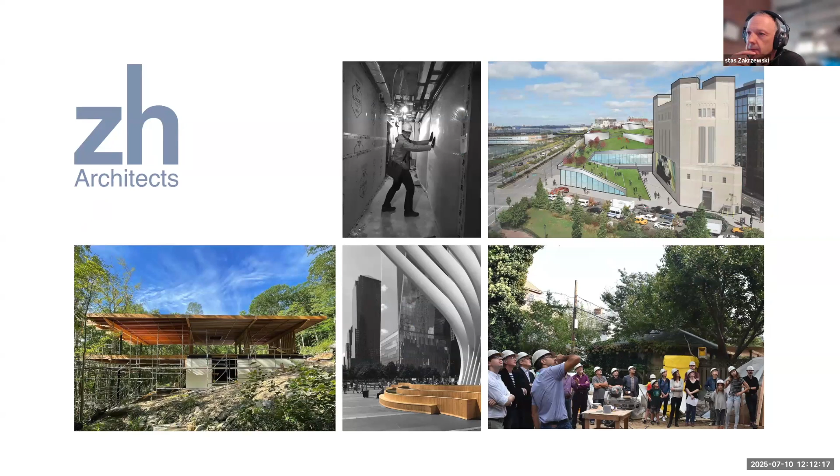Just our different outlook. We really think that architecture is about practice, or at least our firm is about practice, but it's also about all of the aspects that go with that, which I think are very important. So education, we've provided a fair amount of tours. You can see a lot of young kids at these tours, get them young. And we're interested in advocacy as well.

So trying to look at the codes and how they can change, because we're all able to show our buildings by certain means, social media, etc. We can give tours, but really one of the strongest and best ways of getting people to build better is to change the laws, and we've been very involved in that too.

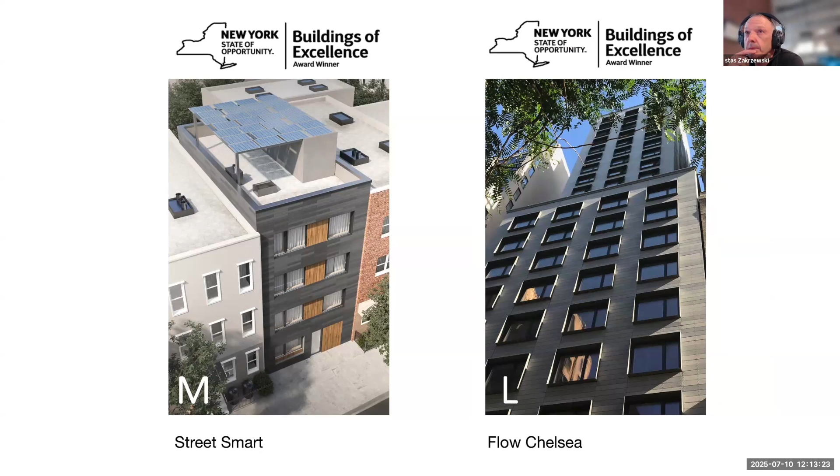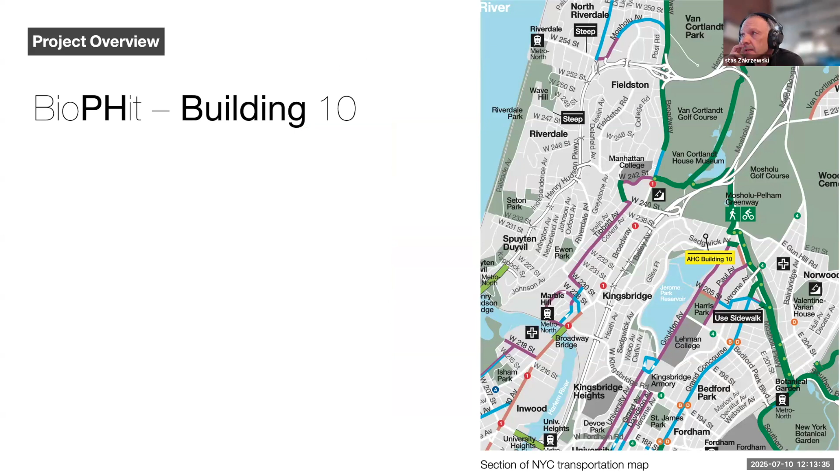So we have a couple of certified projects, and we have another one just happening right now. And we have two Buildings of Excellence winners, and now the third is this one, BioPHit. So BioPHit is basically Building 10, which is part of the Amalgamated campus up in the Bronx. And it's a series of buildings that were built starting in the 20s. It was really started off as a counterpoint to all of the tenement buildings down the Lower East Side, principally. It was instigated so that they wanted to create housing that was of a different type. And hence the campus, and hence all of the larger buildings with larger windows, more ventilation, etc.

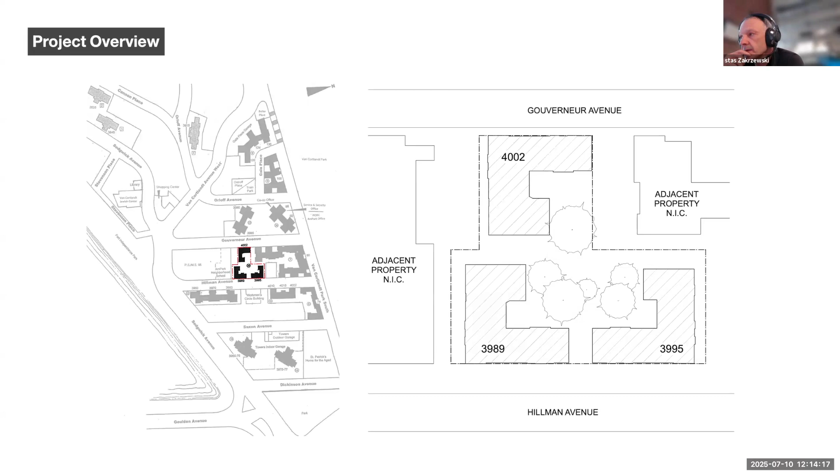The particular three buildings that we're talking about here were built in 1941. So they weren't the first buildings, and they're not the tallest. They're kind of 2.5 stories in size. And there's a total of 48 apartments. It's around 60,000 square feet surface area for all the buildings. The apartments are in pretty bad shape. The roofs were neglected for many years.

As with many affordable housing buildings, there's challenges with getting funding. And this campus is really affected by the state of their facades, etc. They're spending a lot of money repairing buildings rather than looking ahead. So this project is important to try and fix it up and really get it to the next stage. There's only 10 apartments that are occupied out of the 48, and we really want to change that for obvious reasons.

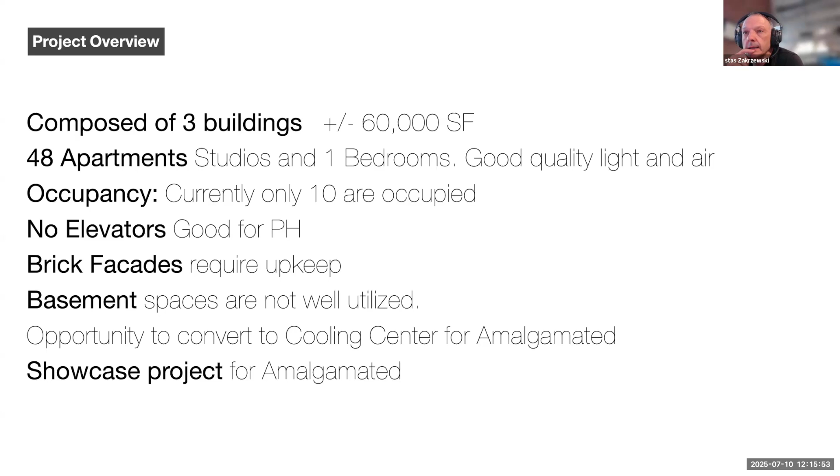There's no elevators in this building, so a little bit easier for passive house requirements. The brick facades require upkeep, relating to the comment I just made about all of these buildings requiring a significant amount of money to keep up those facades. So that's a consideration that we're looking at on this project. The basement spaces aren't well utilized, so there's an opportunity to convert some of those spaces. And it's really going to be a showcase project for Amalgamated, and hopefully will serve as a case study that they can replicate for the other buildings.

So these are the original drawings from the architect George Springsteen. Beautiful drawings, and lays out all of these plans with many bathrooms with windows on the outside, etc. And mostly one bedrooms and studios. It's brick structural walls, and then steel columns and wood framing, and the stair cores are masonry. So there's a single stair egress for all the apartments.

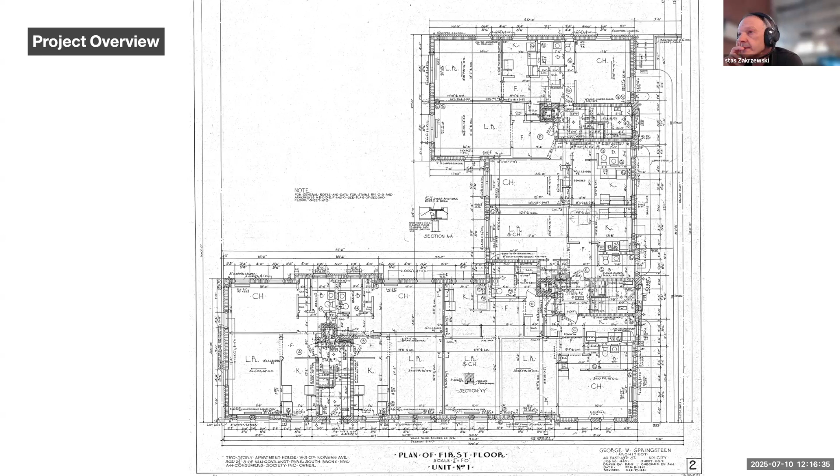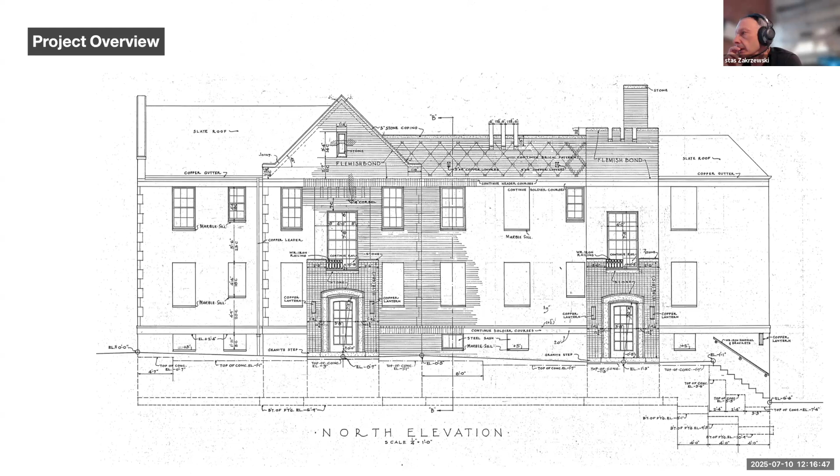There are some very nice features on the facades with some brickwork and stonework around the entrance doors. And obviously, you can see here some of the repairs that have been done. A few years ago, there was such extensive roof damage that the roofs were completely redone. So there are very nice slate roofs and flat roofing as well.

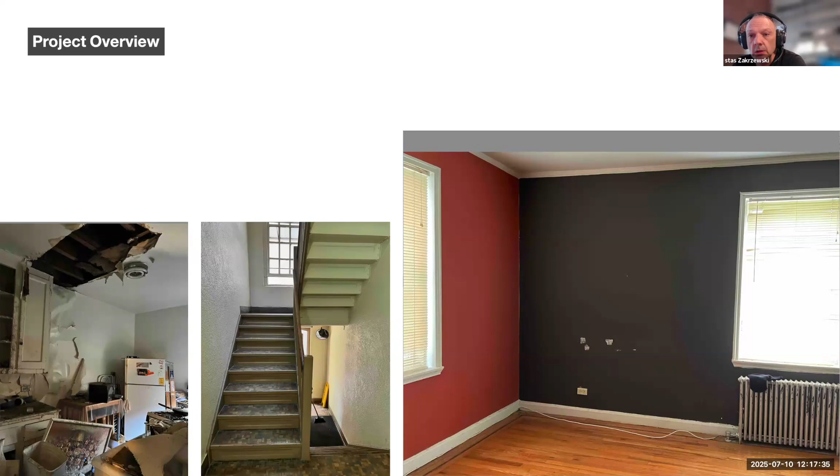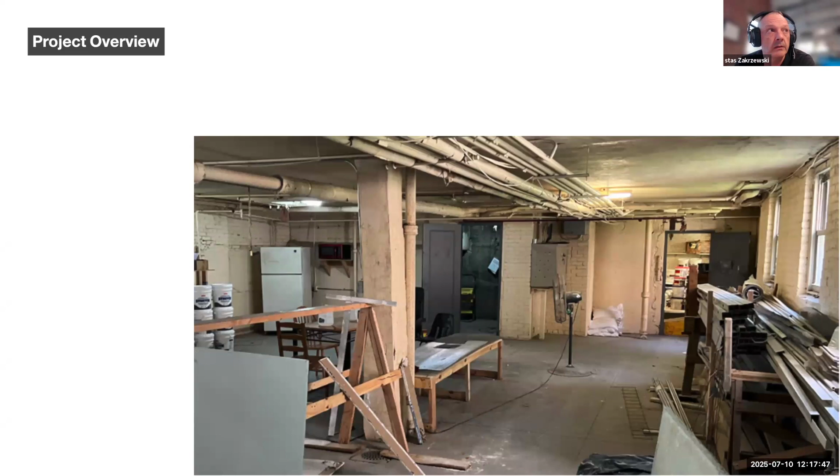So that area, it's been contained in terms of the damage, but obviously there's a lot of interior repairs that need to be done. The interiors, here's just a few images. On the right, a lot of rooms have double aspect windows, really good light and air. And then obviously the photograph on the left is quite typical in some of the units where there's been some significant damage in the apartments. Basements, this is very typical as well. Good opportunity to convert and make better use of that space.

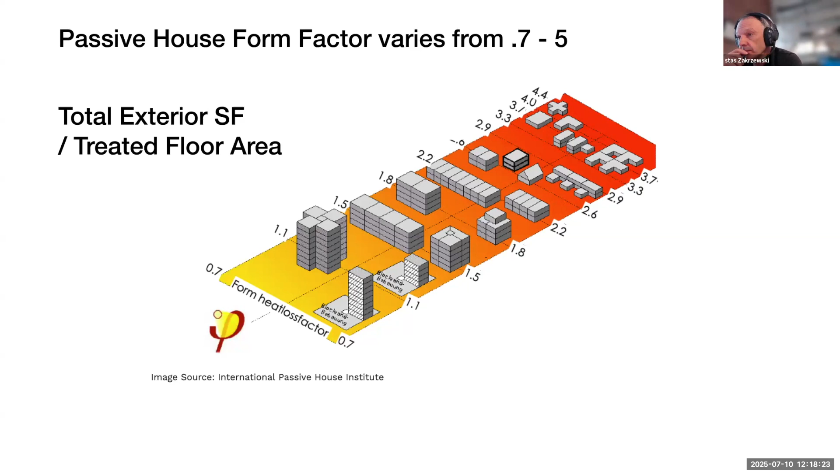So I think it sounds like most participants are pretty familiar with Passive House here, but one of the things that we need to look at for Passive House projects like this is what's the form factor. And it varies, obviously. If you pack a lot of people on top of one another, your building is going to make it easier to make that energy efficient, right? So there's calculations to provide that. Obviously the tall buildings usually have better and lower form factors.

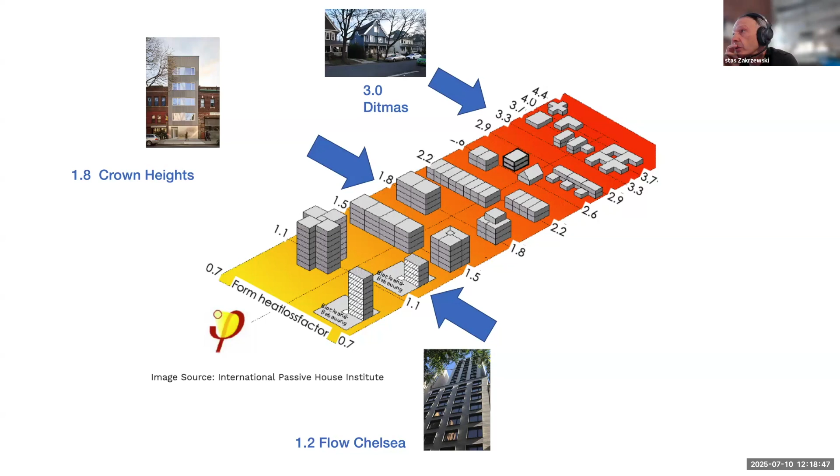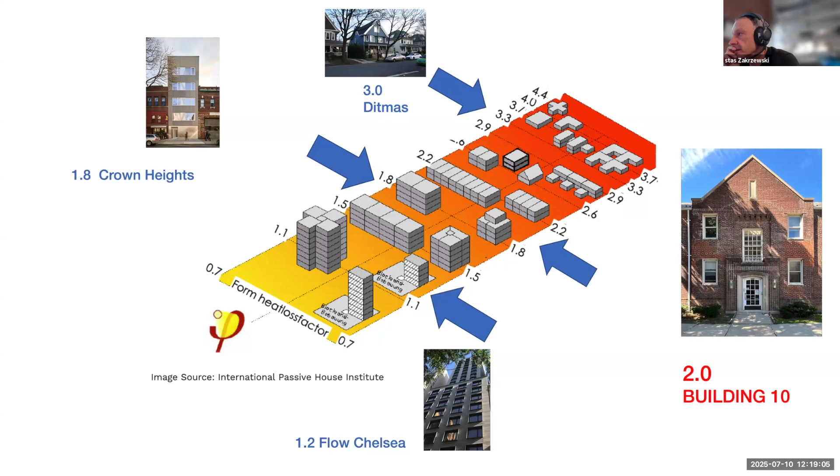Our previous projects, our tall building in Chelsea at 1.2 are much more efficient. Ditmas Park single family building is very tough, around three, right? Because you've got all those exterior facades and just one home there. So this building is, you know, not super great, but not the worst, because it has two floors of units, and some of that floor space is below grade, right? There's two floors and then a basement.

The program for this is to look at this project in two ways. One is to put insulation on the interior and leave the brick as it is. We'll have to do some repairs to the exterior. And then a second strategy is to look at adding insulation and then a new material on the outside. So we're going to be looking at both of these options.

I should note that this is a DHCR project, so it has very long extended timelines. It's not by a private development, so there's a whole process to obtain the funding, etc. So we're going to use that time to look at these different options and see which one works out, because there are impacts when you have to put insulation on the inside. We have some tight tolerances in terms of some of the rooms inside. And then we have also some implications with adding insulation to the exterior. How do we replicate or how do we create a new exterior facade that has some of the charm that these existing facades have?

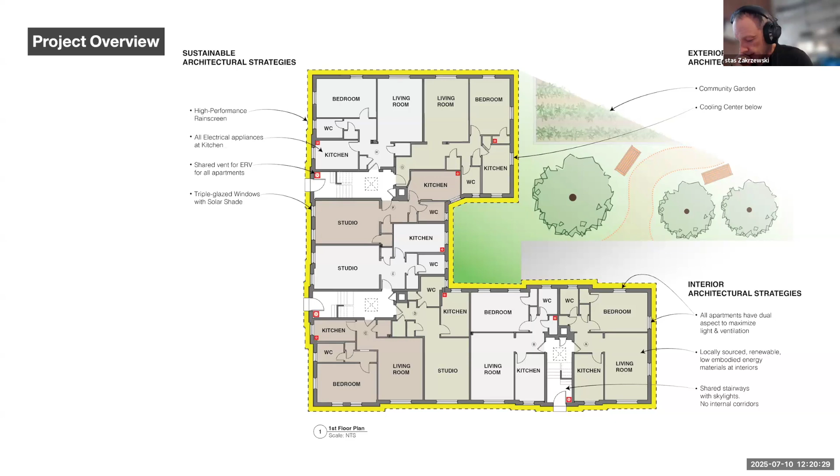And in our experience, the easiest, most straightforward projects are those where we're either doing a new building or we're doing a significant rehab, but where we can make that airtightness layer one single layer on the outside of the building. And we can't do that in this case. So this is going to be really part of the most challenging aspect of the project.

It is interesting also that we have three buildings and they're almost the same. There's very small variances in one of the buildings. So it presents an interesting opportunity for us to look at, well, do we make them all the same? Do we change a few little features in this building so that we can monitor it and see how each one does? Do we change some of the solutions? So these are all things that we're going to be looking at as we go through the design.

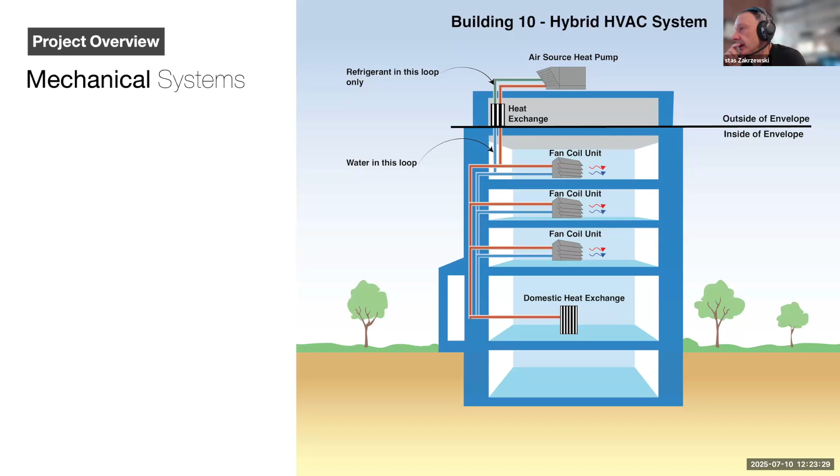So we're going to have an air source heat pump in the outside of the envelope, and we'll have a heat exchanger, which will then loop cold or hot water to different fan coil units within the building. So that's the main way that we are looking to use water as a refrigerant rather than some of these refrigerants that are more flammable or more toxic. There is going to be a ventilation system, an ERV system. We're probably looking at something on this roof plane, and we're going to bring air down to the different units.

So heat pump water heaters, it's pretty standard now. Heat pump dryers, induction cooktops, that's pretty much standard for projects like this. The interesting thing about the induction cooktop is the whole campus of 13 buildings is looking at putting in induction cooktops. And you may be aware that these induction cooktops a lot of times require 220 volts, and in some of these buildings it's really challenging to get that. So they have come up with some great induction cooktops that have batteries in them and that allow you to stay on 110 and use the battery to kick in extra power when needed.

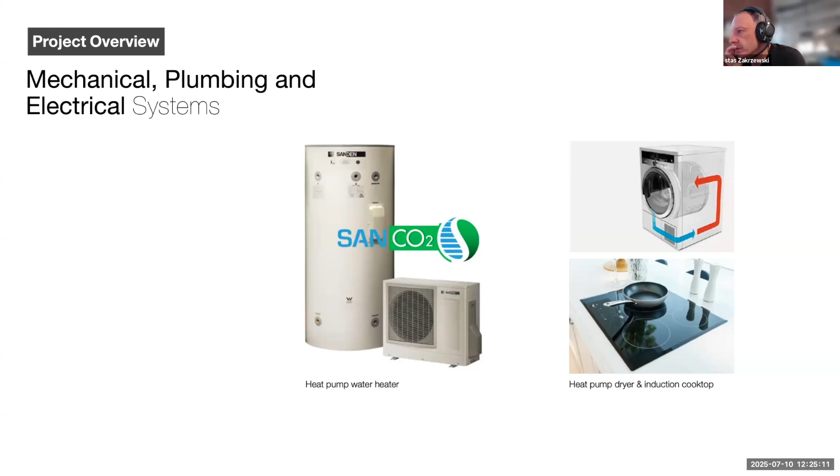So the whole campus is actually looking at this, because these types of special induction cooktops are more expensive, right? They have a battery and all that. So we'll be looking at whether or not it's cheaper to just have the 220 power, or whether it's better to use these types of cooktops. In this project, it will probably be better because we're probably going to have to bring in more power anyway. But it looks like on the rest of the buildings in the campus, we're going to be going with the battery versions.

So, healthy materials. This is a big part of the way we are looking at passive houses now, because it's not just enough to make them super energy efficient. They are airtight or more airtight than regular buildings. Even though they have ventilation, from the buildings that we've done and completed and looked at, it's really important to make sure that our materials are as healthy as can be for a number of reasons. So in terms of adhesives, grouts, there's lime-based joint compounds. There's red list-free products that you can get for those grouts, adhesives, and sealants.

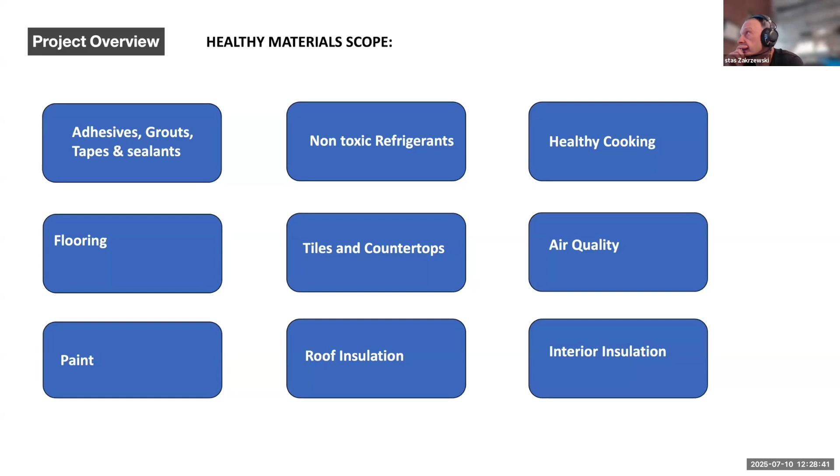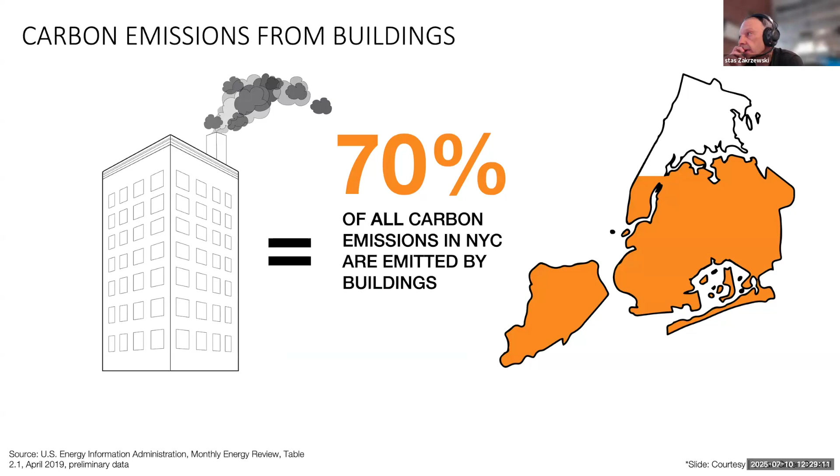So you're probably all familiar with Local Law 97 and the requirements, the amount of emissions emitted from all of these buildings. I have not been able to calculate yet where we're going to be at on these buildings, but since they're on the same lot, they will need to meet these requirements. So all of this will be good in the end for the co-op. Currently a D rating. We're hoping to get that up to an A rating.

Most of our passive house projects are in the mid 90s in terms of an energy efficiency rating once it's completed. It is interesting that one of the buildings that we built, a passive house building in Midtown, there was another building that was built at the same time. I think it was started about 6 months before us. It is not a passive house, and it was completed, and it has a rating in the 60s.

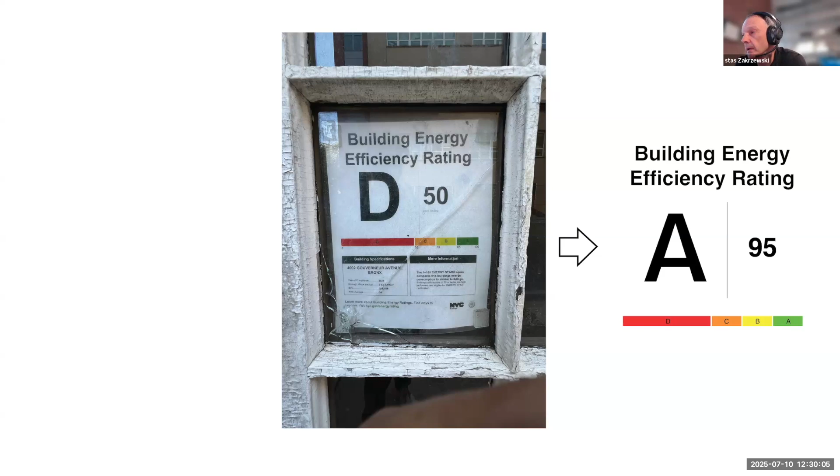So it's a regular code compliant building built to the same code compliances as our other building. And it's just interesting to note what a difference that makes, right? That air tightness and just a little bit more insulation than is required from minimum base code. Necessity is the mother of invention. I love that quote. This is why we're all here, looking to do all of these types of buildings.

Buildings of Excellence is a great program. It's been interesting working through on other projects for the different milestones. Maybe some of you are very familiar with this, maybe some of you aren't, so I'll just very briefly talk about it. So we submitted for this. We were awarded $700,000, and basically there will be milestones that we will have to submit for as the building is designed, as it's permitted, as it's completed, etc.

So NYSERDA administers this, and we work with our team to provide all of the required documents. And there's quite a lot of documentation and follow-up and work that we need to do to comply with getting the funding for our clients. This is just one example of one of the things that we needed to submit on milestone 2 for a large building. We had changed from 18 to 24 stories, so we had to address that and show what the changes were. Attachment A, which is a lot of data on the building,

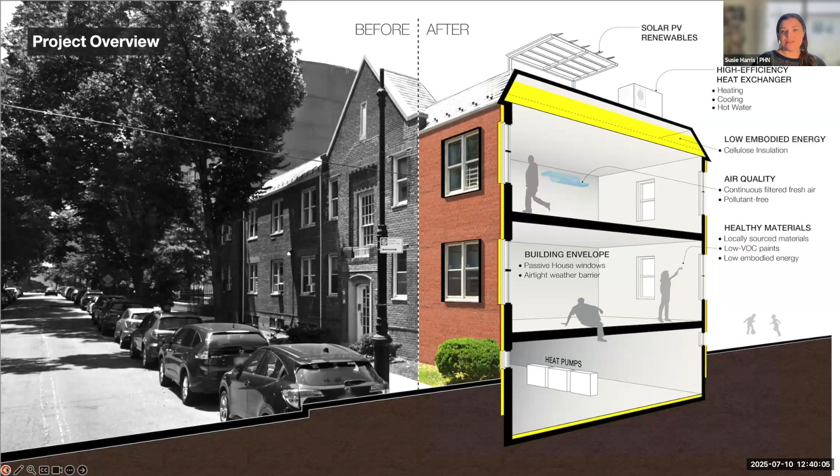I just want to say this is fantastic and I really appreciate it, especially the information in the beginning about refrigerants and dealing with that in a multi-story building like this. And I'm curious, if you all, and maybe you don't do this because you want to keep them to yourselves, but if you've come across contractors that are just wizards at insulating in New York State, it would be nice to be able to share their information and really help them,

or perhaps even have them on Passive House Network, offer training, or a quick discussion on how they're doing things that we can share with others. So, if you guys find a whiz and you're not scared of telling anyone about them, please let us know. You can put it in the comments here or bring it up right now if you've come across anyone who just seems to think out of the box. Well, I know in California we have a few.

Yeah, I mean, in New York, there's Kevin Brennan, who is an air tightness guru, really. And we have used him on projects to help strategize because, just before this call, Susie and I were talking about contractors and unwillingness to do passive house. And our solution when the contractor is starting to have cold feet or find reasons for not doing it, then we often say, well, okay, we'll take care of that aspect of it, right? You just build your building.

You are going to have to jump on board, right, and really learn from it, and participate in it, and it can work. It requires a lot of rigor because it's not just enough to have someone come in at certain times to do that insulation or air tightness work. It requires buy-in from that contractor. So in my experience, they have to really want to do it and learn from it. And we have to just be able to make sure that that happens. Yeah.